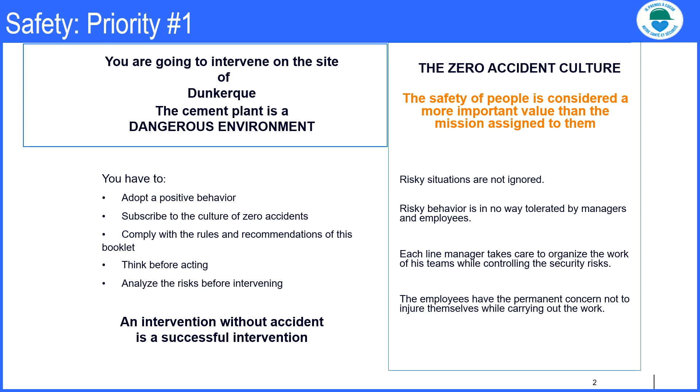To work on our site, you must wear personal protective equipment adapted to the operation you are about to carry out. In all cases, the following personal protective equipment is mandatory: a helmet with chin strap on which must appear the name of the company and the security pass, covering goggles with bib, high safety shoes, gloves suitable for the operation you have to carry out, covering and high visibility work clothes, and finally hearing protection.

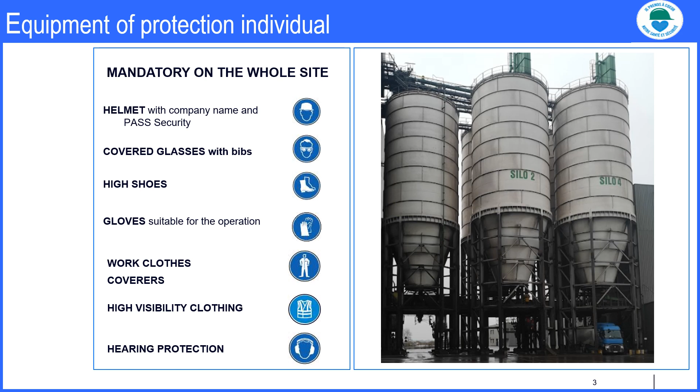Warning: people wearing glasses should wear suitable over glasses or safety glasses. Covering glasses worn over corrective glasses will not be accepted in our establishment. Depending on the risk analysis, the type of operation and the place of intervention, you must complete this basic personal protective equipment with appropriate equipment.

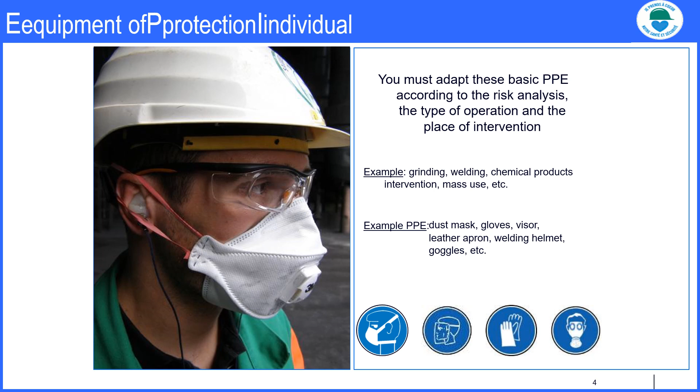Travel is one of the leading causes of accidents in cement plants. Seemingly banal, moving around a factory involves the risk of accidents that can be avoided by applying simple rules. I don't run, I hold the banister on the stairs going up and down, but also when moving around when possible. I move with vigilance, paying particular attention to holes, steps, obstacles, and ruts that may be in my path.

I adapt my route according to the conditions, especially on icy or rainy days. I take the pedestrian paths when they exist. I do not cross markings without the agreement of the site manager. I stay away from vehicles and machinery, or I report to the driver before entering his traffic area. I do not pass behind a moving vehicle. I don't walk in the middle of the road. I wear gloves when I travel, and I don't put sharp objects in my pockets. And finally, I wear high visibility clothing.

When traveling in a vehicle, I adopt an attentive driving style, and I respect the road signs in the factory. Wearing a seat belt is compulsory in all vehicles and at all times, even for short journeys. The speed is limited to 15 km/h on the site. Vehicles are parked in reverse. Personal cars are prohibited on construction sites. The use of mobile phones while driving is prohibited throughout the factory. Finally, a valid driver's license is mandatory, as well as a driving authorization, and a CACES depending on the vehicle used.

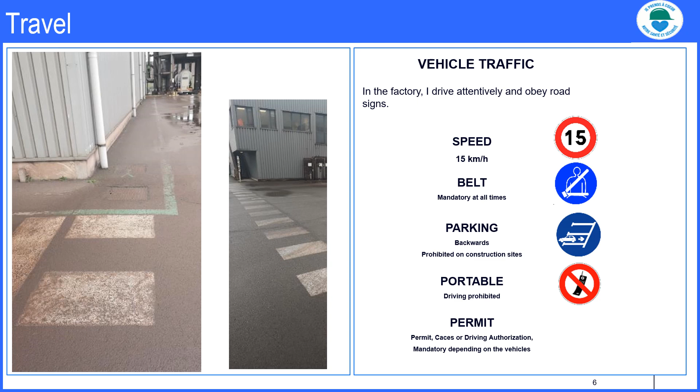During an intervention, communication between the various stakeholders is a key element of your safety. If I am site manager, I take note of the elements of the prevention plan and the risk analysis and communicate them to the workers. I define and communicate the operating mode. I plan the safety induction for workers. I post the safety documents on the site. I ensure compliance with the consignation procedure. If I am intervening, I must have received a safety induction for workers.

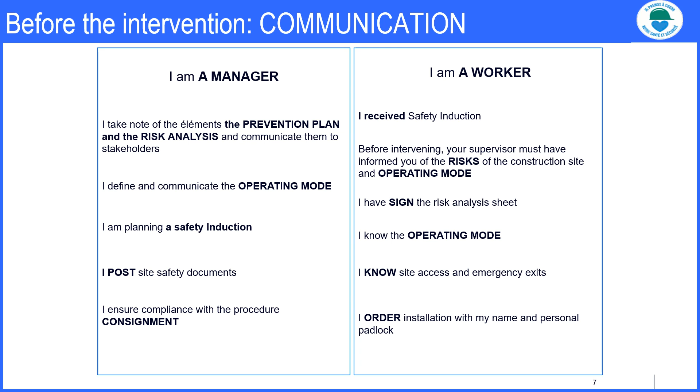Before intervening, your supervisor must have informed you of the risks of the site and the operating mode. I have signed the risk analysis form. I know the operating mode. I know the accesses and emergency exits of the construction site. I record the installation with my nominative and personal padlock.

Before intervening, the installations concerned must be secured to prevent accidental starting or the release of energy during your intervention. This lockout operation is carried out by the Lafarge lockout manager, in particular using padlocks. Any intervention on equipment or in the immediate vicinity must be recorded.

As an intervener or manager, you must remember that an intervention requires the installation of at least one padlock on a device or on a deposit box. At the end of your intervention and after agreement from the Lafarge correspondent, you must deconsign. All the devices and information relating to the consignment are written on the consignment note, a duplicate of which must be posted on the site.

Your padlock must be personal, nominative, and unique key. You must have 2 padlocks available per person. Failure to comply with the Lafarge consignment standard exposes you to a major risk of a serious and potentially fatal accident. For your safety, respect this procedure. If in doubt, contact your Lafarge correspondent.

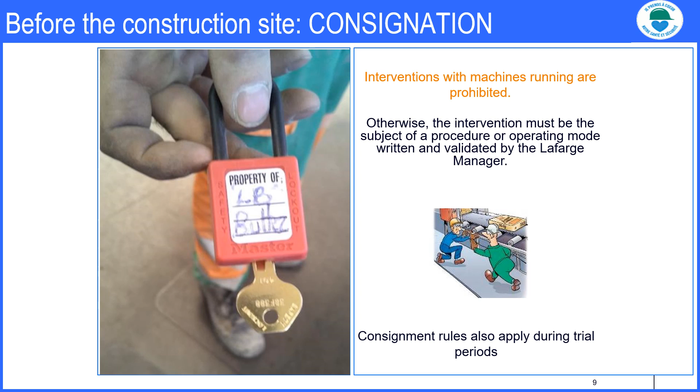Interventions with machines running are prohibited. Otherwise, the intervention must be the subject of a procedure or operating mode written and validated by the Lafarge manager. Consignment rules also apply during trial periods.

During your intervention, you must manage all aspects of your site in terms of marking, storage, and cleanliness. Your construction site must be clearly marked. Within this work area, you are the only one who can authorize access to your worksite to other outside contractors or Lafarge personnel. Marking must be adapted as your work progresses and according to the risks in order to ensure a minimum footprint and good circulation.

Work sites must be tidied up at all times, access must be free and clear of all obstacles, dangers marked, gas cylinders must be attached, electrical cables and air hoses must be positioned so as not to cause a fall. Windsocks must be equipped with anti-whip cord.

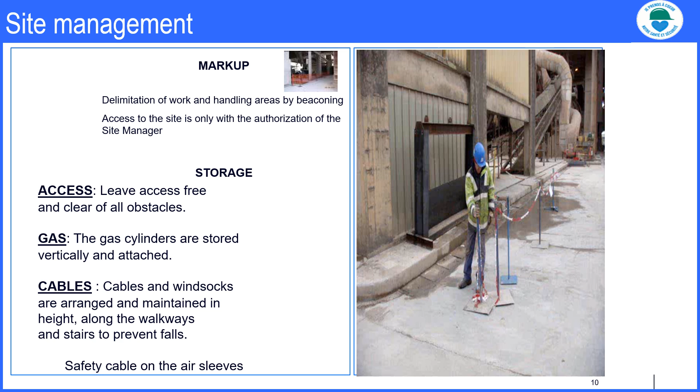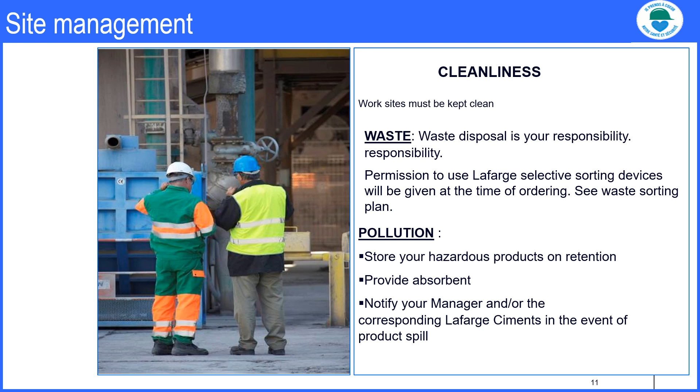The site must be kept clean. Waste must be eliminated gradually. In the event of pollution by a leak or spillage of product, immediately notify the Lafarge correspondent and take immediate measures to limit the impact of the pollution.

Working at height is one of the main causes of fatal accidents within the Lafarge group. In order to reduce exposure to the risk of falling from a height, the group has implemented a standard which defines the rules to be applied when working at a height. For Lafarge, any work carried out at a height greater than 1.80 meters is considered work at height.

As a first step, you must define operating methods favoring work on the ground in order to eliminate the risk. If this is not possible, you must use fall protection equipment either by installing fixed protection such as catwalks or guardrails, or using temporary work platforms such as aerial work platforms, scaffolding or individual rolling platforms to prevent falls. Finally, if the installation of these materials is not possible, then the use of personal protective equipment such as harnesses is authorized.

The use of a harness will be subject to a formal permit before each operation, prior training by an approved organization, and authorization. Finally, the hardware will be checked every time.

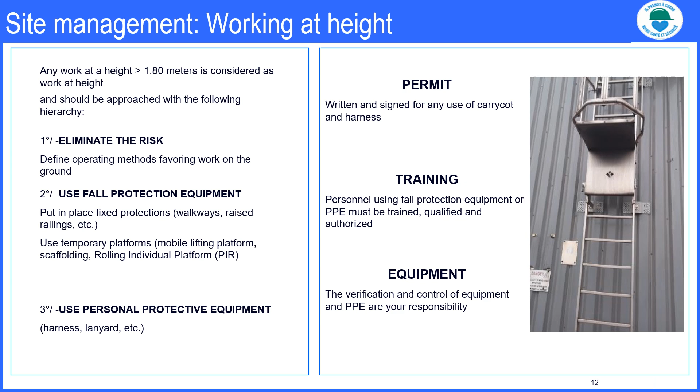The scaffolding must be fitted by persons authorized to carry out this type of operation. Once the scaffolding has been erected, it must be received by an authorized person or organization who will issue access authorization. As long as the mentioned authorized access is not put in place, access is prohibited. It is strictly forbidden to modify, even temporarily, a scaffolding. If necessary, the modifications must be made by authorized persons, and the modified scaffolding must again be accepted.

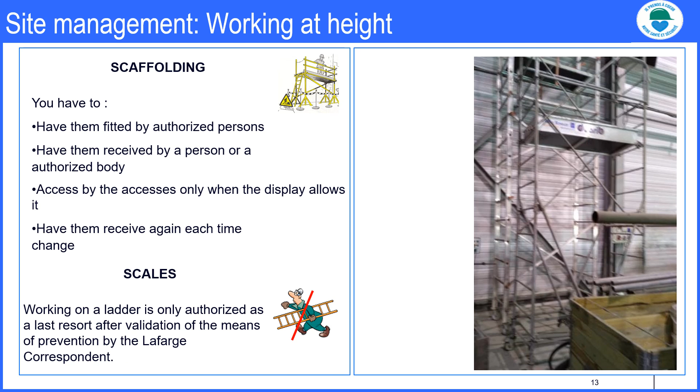Work on a ladder is only authorized as a last resort after validation of the means of preventing falls by the Lafarge correspondent. To use a lifting platform, you must have a CACES and a driving license, the certificate of conformity of the equipment, and a knowledge of the instructions for use.

A supervisor familiar with emergency maneuvers will be positioned at the foot of the platform to intervene in the event of a problem. It is strictly forbidden to get out of the basket to access a site, to climb on the railing, or to use a basket to lift loads.

Work on an individual rolling platform is authorized. Any use of a harness or cradle will give rise to the drafting of a work at height permit which must be validated by your superiors and given to the Lafarge correspondent. The workers must be trained by an approved organization, and finally the equipment must be inspected and checked before use.

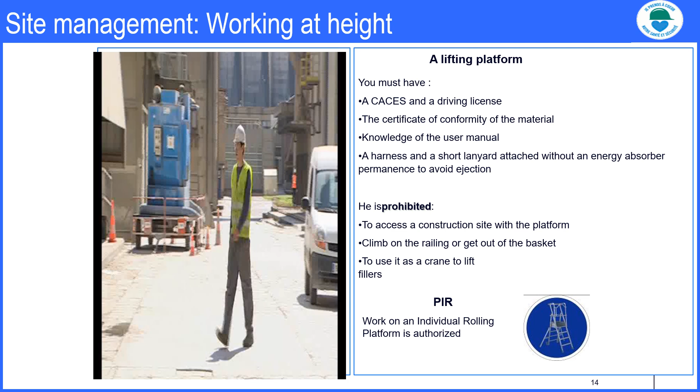To use fall protection equipment or personal protective equipment, you must be trained and authorized. As the consequences of a fall are always serious, deviation from the working at height standard cannot be tolerated.

Handling is a common operation on our sites and must be carried out with care and professionalism. In the case of handling with equipment such as a crane or hoist, you must comply with the following rules.

Before any operation, estimate the load to be lifted, check the authorized load of the lifting equipment - crane, hoists, slings, shackle, etc. Respect the slinging rules, and in particular the maximum authorized angles. Check that the head of maneuver knows the gestures of maneuver, mark out the handling area, and prohibit passage.

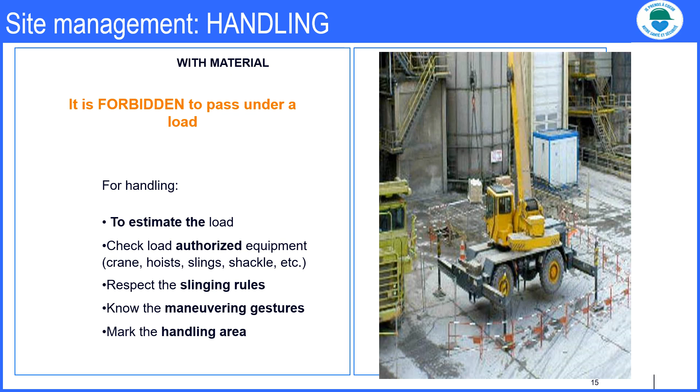In all cases, it is strictly forbidden to pass under a load. Manual handling will be avoided in favor of mechanical handling means in order to spare the workers. If the use of handling equipment is not possible, the application of gestures and postures must be systematic.

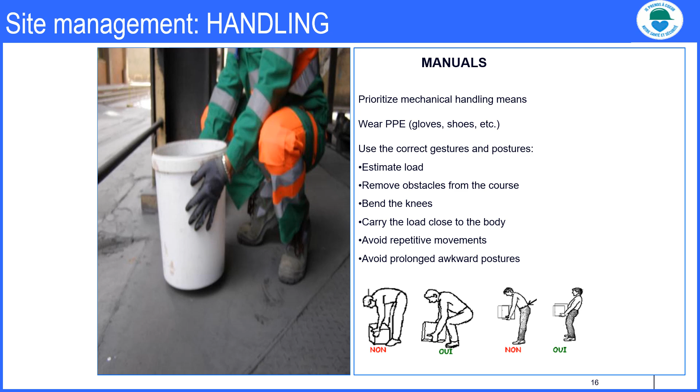Estimate the load, remove obstacles from the course, bend the knees, carry the load close to the body, avoid repetitive movements, avoid prolonged awkward postures. In all cases you must wear personal protective equipment, in particular gloves and safety shoes.

The use of hand tools such as grinders, drills, and sledgehammers or welding machines is very common in cement work. For all operations, it is mandatory to wear appropriate personal protective equipment and to check the condition of the equipment before and after use.

In any case, think before you act and position your body so as not to be in the path of the tool or the projections generated by the tool. This simple precaution would make it possible to avoid half of the accidents with stoppage caused by this type of tool.

Interventions with drill or grinders must be carried out with waterproof goggles, gloves and clothing to protect the body against burns. In all cases, the original safety devices must be present on the machine, in particular the handle which allows both hands to be on the tool.

It is your responsibility to position screens or protective tarpaulins, if necessary, to prevent metal drips, projections or arc strikes from affecting people working near the site.

The use of cutting tools such as cutters or knives must be done with anti-cut gloves and by positioning the body out of the path of the tool.

The use of striking tools such as sledgehammers, hammers, impact wrenches, chisels and other metal objects made from hard steel can generate metal shards whose trajectory is unpredictable and which pierce normal work clothes.

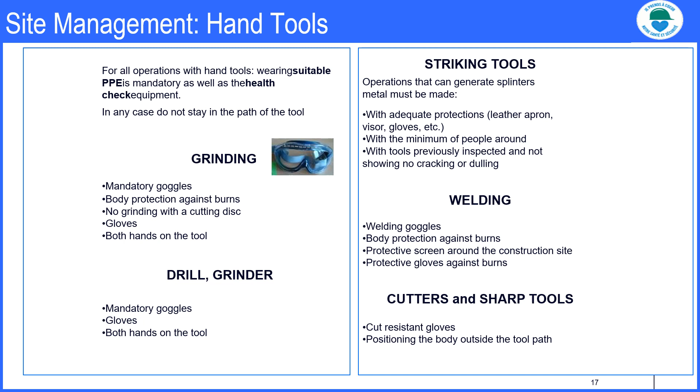The operations of disassembly must be carried out carefully to prevent accidents. Before starting a dismantling, you must carry out a risk analysis and define an operating procedure specifying the details of the operations and the materials to be used.

The major risk is the lack of control of residual energies such as weight, pressure, relaxation of constraints or electricity, which can surprise the worker during dismantling.

As with other operations, the worksite must be kept clean and tidy, the deposited materials must be evacuated as they occur, the collective protections concerned must be put back in place or modified accordingly, and the circulation spaces must be restored, conditioned by plugging the holes, putting back the railings, etc.

Several interventions can take place in a limited space. The associated risks are identified in the risk analysis sheet, but you must be vigilant and control the risks generated by your intervention for those who are at your side, but also above and below. For it, communicate with your Lafarge correspondent and other stakeholders.

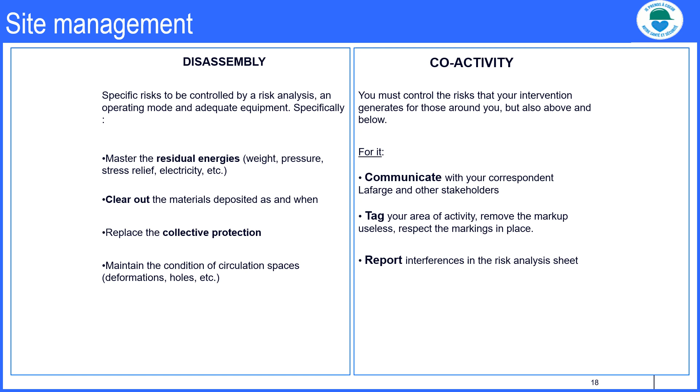Mark out your activity area, remove unnecessary markup, respect the markup in place. Report the interferences in the risk analysis sheet. Overlapping work will not be accepted.

During the duration of the intervention, the proper management of your site will be verified by your Lafarge correspondent, audits and safety visits, with boots on the ground. The discrepancies observed must be corrected and may lead to work stoppages.

In the event of serious or repeated breaches, we reserve the right to deny you access to the site. Compliance with safety rules is a condition of employment.

The following information is provided for information only. For complete information, refer to the Labor Code. You must respect the Labor Code, in particular the legal thresholds for working hours: the working day cannot exceed 10 hours, the daily rest must be at least 11 hours, the work week cannot exceed 48 hours, the weekly rest must be at least 35 hours.

If you believe you are in danger, you have the right to exercise your right of withdrawal and to stop your intervention. In this case, notify your hierarchy and the Lafarge correspondent.

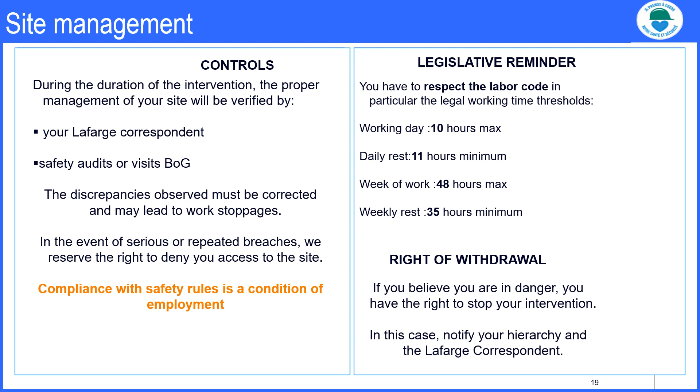Once the work is finished, your Lafarge correspondent checks the work done with you and confirms the end of the work. To complete the intervention, you must release the installations, deconsign and tidy up the site.

Before deconsigning, you must release the installation by putting the safety devices back in place, such as railings and protective casings, and clearing the intervention area of any equipment in order to allow the tests to be carried out and start up. Then, with the agreement of the Lafarge correspondent, you can deconsign the installations by removing all the lockout padlocks.

Finally, before leaving the site area, you must return the equipment loaned by Lafarge, remove your tools and equipment, remove the waste. Report your departure from the site to the Lafarge manager.

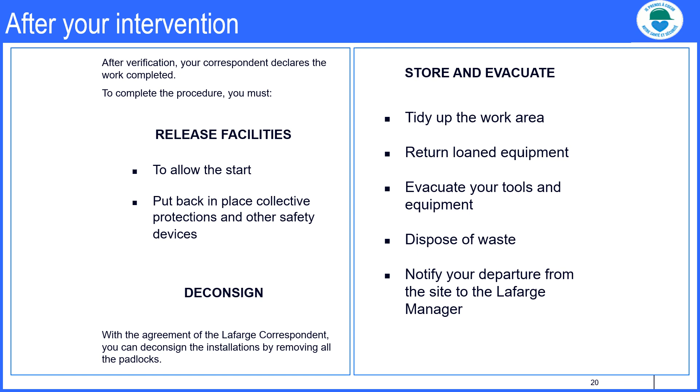The risks associated with work in hot spots are present on our site. For all work in hot spots outside the dedicated area, a complex fire permit must be obtained. It is of course forbidden to smoke in these workshops.

The specific risks are fire, explosion and work on equipment using chemicals. Many chemicals are present on the site. You must know the meaning of the signs, the associated risks and take preventive measures, particularly in terms of personal protective equipment.

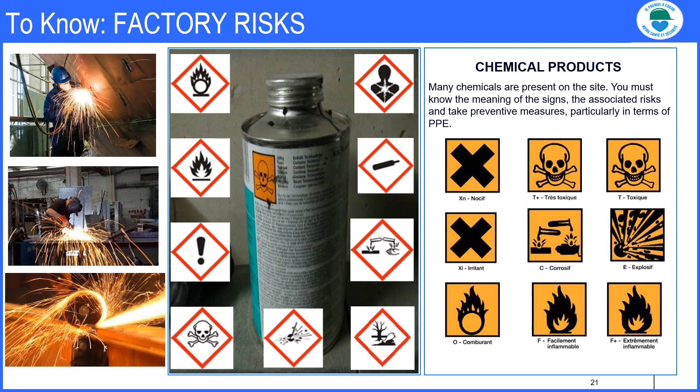Intervening on a stock of material in a silo or a hopper is extremely dangerous and must be subject to specific measures. It's forbidden to walk up on a stock, to enter a silo or a hopper without a permit, to pass or work within 10 meters of a heap, or to access it alone. The specific risks are collapse, burial, and the risk of falls.

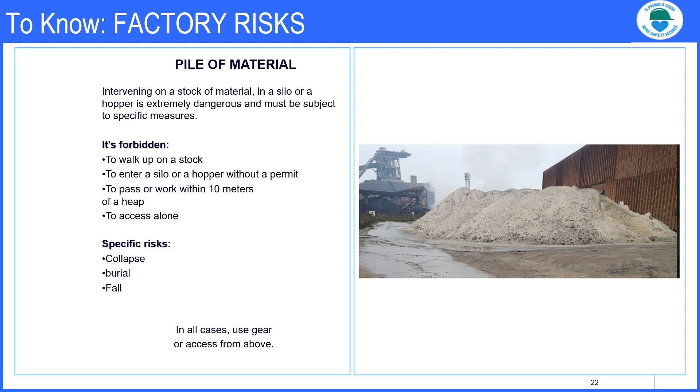The conveyors are very dangerous and have injured or killed several people on our sites. In order to prevent these accidents, Lafarge has set out 10 rules to be observed when working on a conveyor or in the immediate vicinity of a conveyor.

An intervention near a running conveyor will only be authorized if all the protective devices are in place, and if the intervention makes it possible to keep a sufficient distance between the conveyor and the workers. That is to say that clothes, tools, hair and any part of the body are at a sufficient distance from the conveyor. The installations must be consigned before intervening.

The worker shall not modify, misuse or remove the control, locking or signaling devices. It is forbidden to climb, sit, run, stand, touch, or walk on or under exposed parts of conveyors.

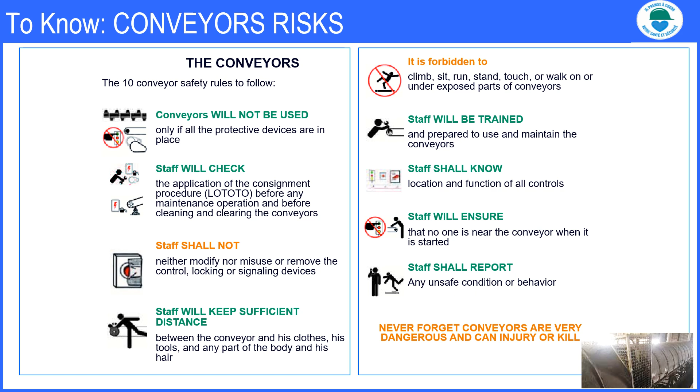Workers must be trained and prepared to use and maintain conveyors. You must ensure that no one is near the conveyor when it is started, and you must report any unsafe condition or behavior. Confined space work requires a permit.

Attention: the start of all our installations is automatic and is done remotely. Access to and interventions in electrical substations are subject to authorization.

Tipping tanks and skips can overturn during unloading. It is forbidden to drive or work near a skip or a tipping tank being unloaded.

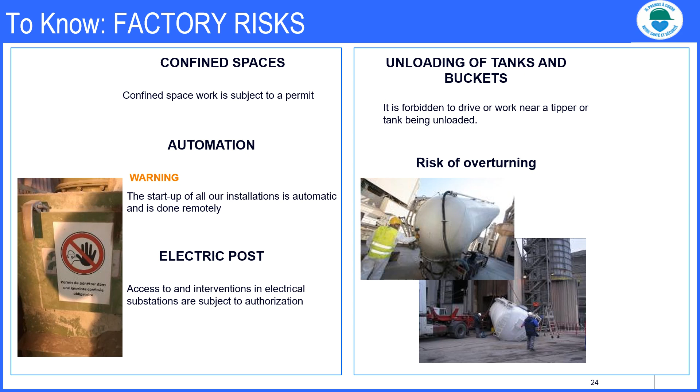Wearing hearing protection is compulsory in marked areas due to ambient noise and the type of intervention, which generate a sound level greater than 80 decibels.

Grinding, welding, cutting, hammering, working next to a machine or a compressor are all common operations in the cement works for which the noise level is higher than the authorized limit. Remember that if you raise your voice to make yourself heard, then the sound level is above 80 decibels.

To drive a handling machine, you must have a driver's license, a driving authorization and a CACES certification.

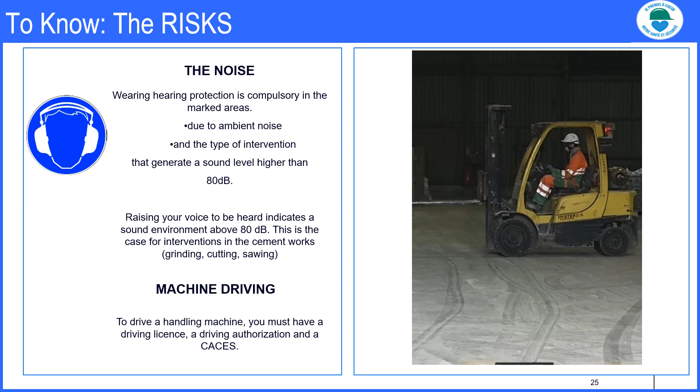The clinker, cement, but also exhaust gases, grinding and welding operations, and more generally interventions in the cement works generate dust which can have an impact on your health. The dust most dangerous to health cannot be seen, dust with a diameter of less than 10 microns.

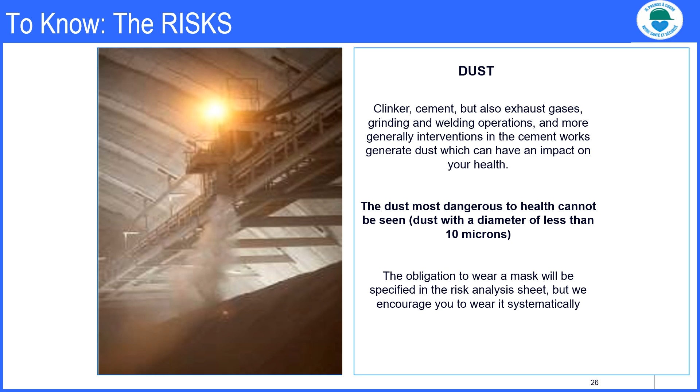The obligation to wear a protective mask will be specified in the risk analysis sheet, but we encourage you to wear it systematically. In the event of an accident, keep calm, protect the victim by cutting off energy, electricity, gas, etc.

Quickly examine the condition of the victim or the importance of the disaster in order to be able to give precise indications, alert the emergency services and the central room, and rescue the victim.

If you are trained, carry out emergency actions adapted to the victim or the disaster. Emergency numbers: 438 from a landline or 0328 25 94 38 from a mobile phone.

Any accidental fact must be reported immediately to the Lafarge correspondent.

In the event of a minor accident, Lafarge encourages companies to offer a modified workstation with the agreement of the occupational physician to ensure continuity of work.

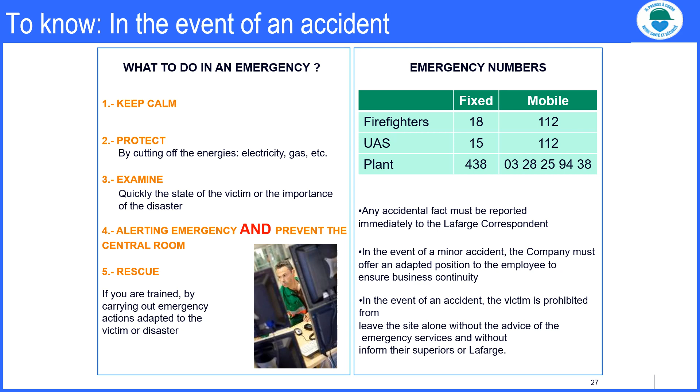In the event of an accident, the victim is prohibited from leaving the site alone without the advice of the emergency services and without informing his superiors or Lafarge.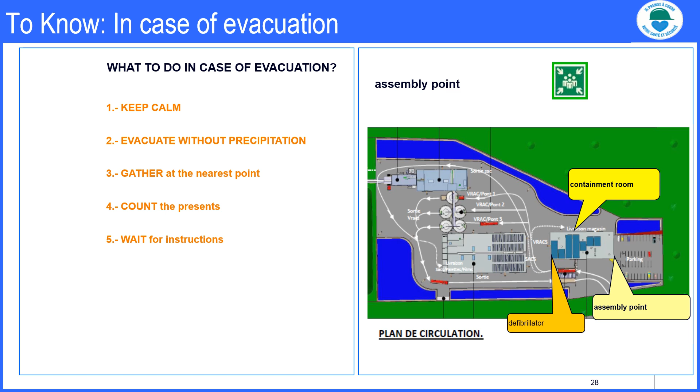Certain circumstances may lead us to evacuate the facilities. In case of evacuation, keep calm, evacuate without precipitation, assemble at the nearest point, count the presence, and wait for instructions.

Access is through the main gate. Personal vehicles are prohibited outside the visitor and company car parks.

Lafarge provides sanitary facilities and a few changing rooms. Please respect these facilities and keep them clean.

During production stoppages, the company can install one or more bungalows in the activity area.

You must pass the security reception before intervening within the factory to obtain the security pass, valid for 1 year, and to stick on the helmet.

Lafarge cement sites have ISO 14001 environmental certification. Our environmental policy is to minimize dust emissions and gaseous emissions, to save natural resources, to integrate in the best possible way into its environment, and to prevent and organize the management of accidental situations.

We expect subcontractors working on the plant to subscribe to this policy, particularly in terms of waste sorting.

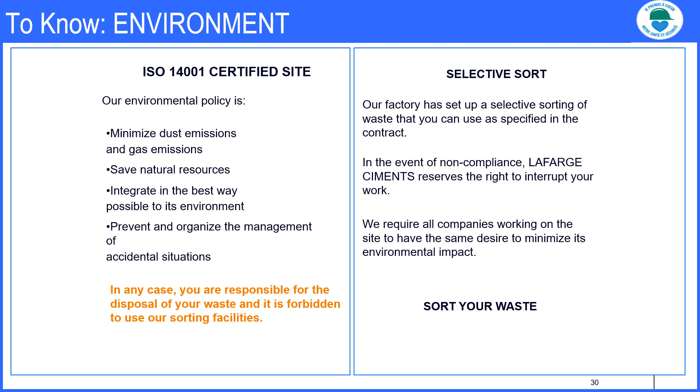You are responsible for the disposal of your waste, and it is forbidden to use our sorting facilities unless authorized when signing the contract. In case of non-compliance, Lafarge reserves the right to interrupt your work.

The origin of our very serious incidents and accidents in the group has been broken down into categories. 85% of fatal accidents are caused by 8 types of event, 5 of which concern grinding stations.